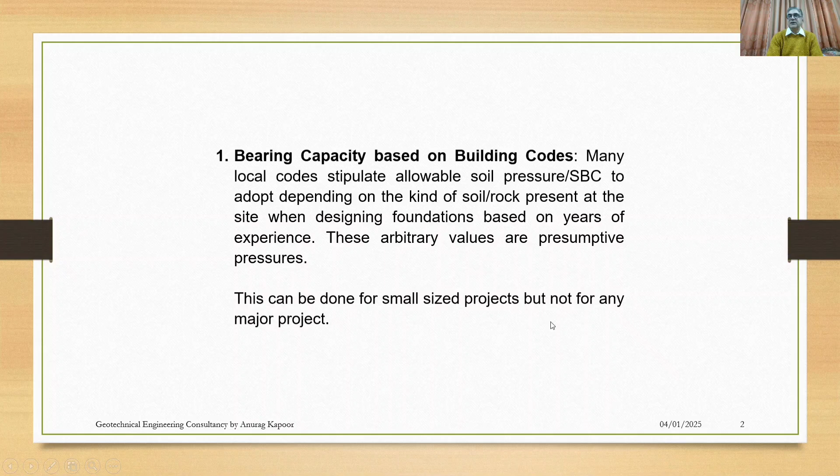Now, the more solid method is bearing capacity based on testing. In this case, thorough laboratory testing and engineering considerations justify adoption of exact worked out bearing capacity for presumed dimensions of foundations at any site based on the samples collected from beneath the ground level along the exploration depth.

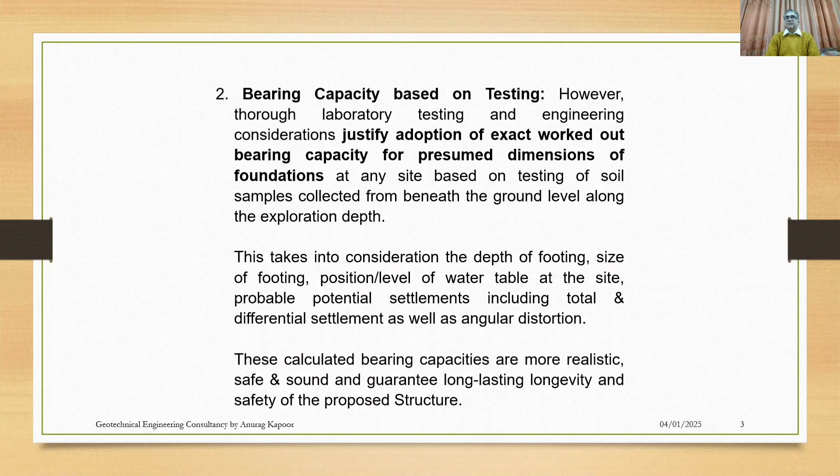This takes into consideration the depth of footing, the size of footing, position of water table, probable potential settlements including total and differential settlement as well as angular distortion for arriving at the safe bearing capacity to be adopted at the site. These calculated bearing capacities are more realistic, safe and sound and guarantee longevity and safety of the proposed structure. These two things I prefer to define before deciding on the factor of safety.

Now, what is factor of safety as per National Building Code of India? Factor of safety with respect to bearing capacity is defined as a factor by which the net ultimate bearing capacity is reduced to arrive at the value of net safe bearing capacity, as per clause 2.2.5 of Section 2 Soils and Foundations under Part 6 Structural Design of National Building Code of India.

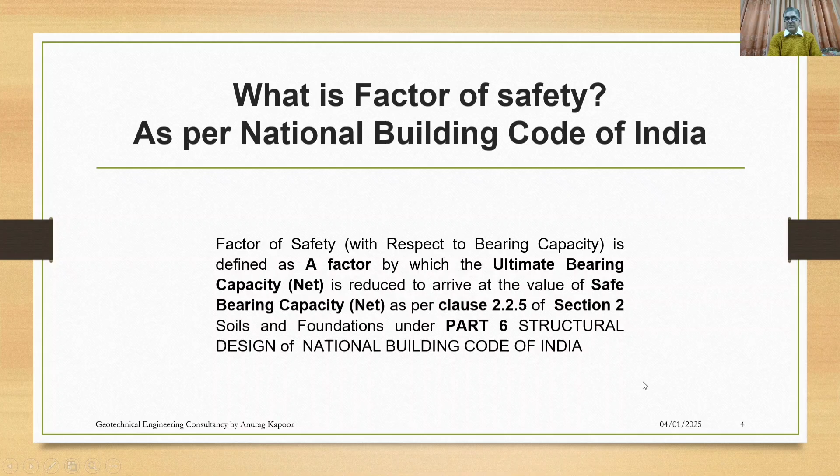Now, what does National Building Code of India say? As per Part 6 Structural Design, Section 2 Soils and Foundations, clause 7.1.2 of this code, allowable bearing pressure, says that it shall be the least of the following two: the safe bearing capacity on the basis of shear strength characteristics of soil, and the allowable bearing pressure that the soil can take without exceeding the permissible settlement limit as specified by the governing IS Indian Standard Code.

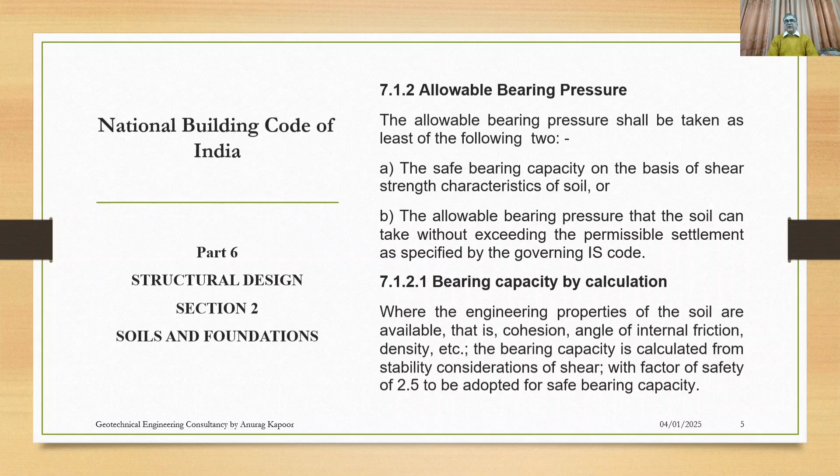Clause 7.1.2.1 of this code says that the bearing capacity by calculation is more accurate where the engineering properties of the soil are available, that is cohesion, angle of internal friction, density, etc. and other soil properties are found out. The bearing capacity is calculated from stability considerations of shear. With this, the code says that a factor of safety of 2.5 should be adopted for finding the safe bearing capacity, but my opinion differs from that. Actually, the factor of safety may vary from 2.5 to 4 and maybe even further up to 5, and it should be decided on a case-to-case basis.

The effect of interference of different foundations should also be taken into account while calculating bearing capacity. However, this is not the usual practice adopted. The procedure for determining the ultimate bearing capacity and allowable bearing pressure of shallow foundations based on shear and allowable settlement criteria shall be in accordance with good practices prevailing in the respective countries' codes, their codal provisions.

Now, this safety factor in foundation design is the factor which a structural engineer usually builds into the design of the structure. Buildings and all other structures are designed based on service loads and type of loading which they have to cater to during their lifetime, as well as the strength of the material of which these are to be built, with a certain adequate inbuilt safety factor already included in it for the sake of strength of concrete, etc.

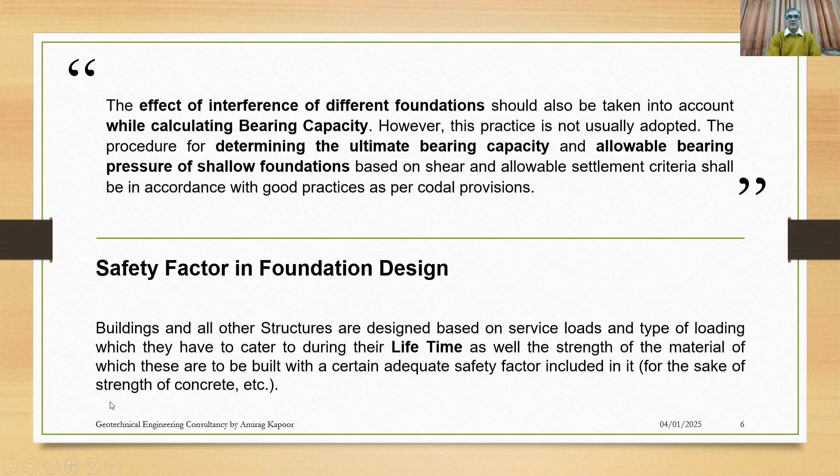Now, soil is very complex. Point to note is that the uncertainties involved in the elements of superstructure are limited in comparison to those in determining the allowable strength of soil. Why? Because soil does vary throughout the region, throughout the district, throughout the country. Now, what does the complexity of soil behavior actually depend on? It varies because of the lack of control over environmental conditions after construction. After the particular structure has been built, no one knows how the soil will behave. And also it depends on the environmental conditions as well.

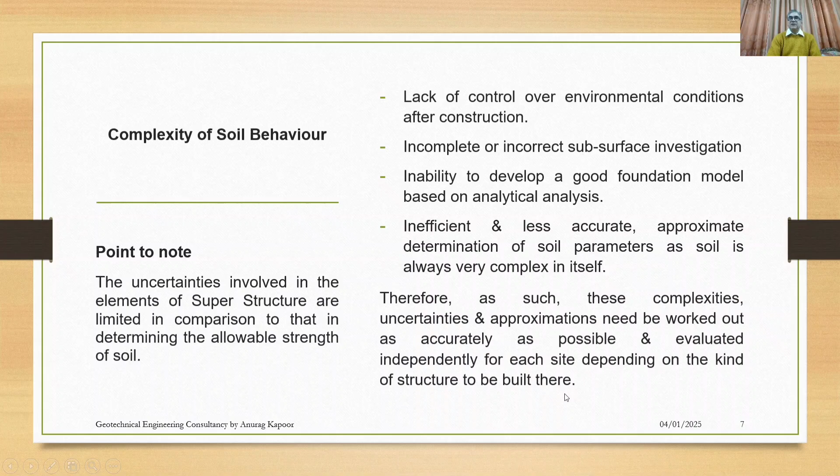Incomplete or incorrect subsurface investigation, inability to develop a good foundation model based on analytical analysis, inefficient and less accurate approximate determination of soil properties, as soil is always very complex in itself. Therefore, these complexities, uncertainties, and approximations need to be worked out as accurately as possible and evaluated independently for each site depending on the kind of structure to be built there before deciding on the actual factor of safety to be applied.

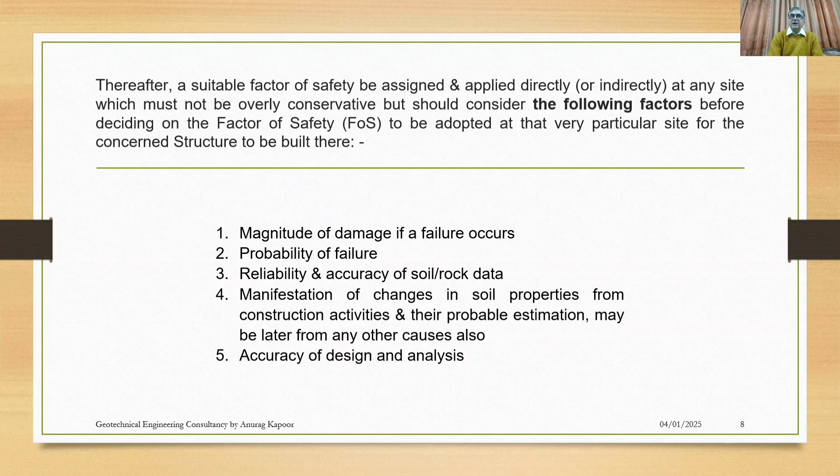Therefore, any geotechnical consultant should look into these following factors and others as well, which he thinks are directly or indirectly related, before deciding on the factor of safety to be applied at that very particular site for bearing capacity calculations. The usual factor of safety values are specified in different books differently. The range may vary a little bit, but it usually is

as per shear: earthwork for dams, fills, it usually is 1.2 to 1.6. For retaining walls, 1.5 to 2. Sheet piling cofferdams, 1.2 to 1.6. Temporary braced excavations, 1.20 to 1.50. And for footings, spread, mat, raft, isolated, strip, it usually is taken as 2.5 to 3, which may further be enhanced to 3.5 or maybe 4 in some cases.

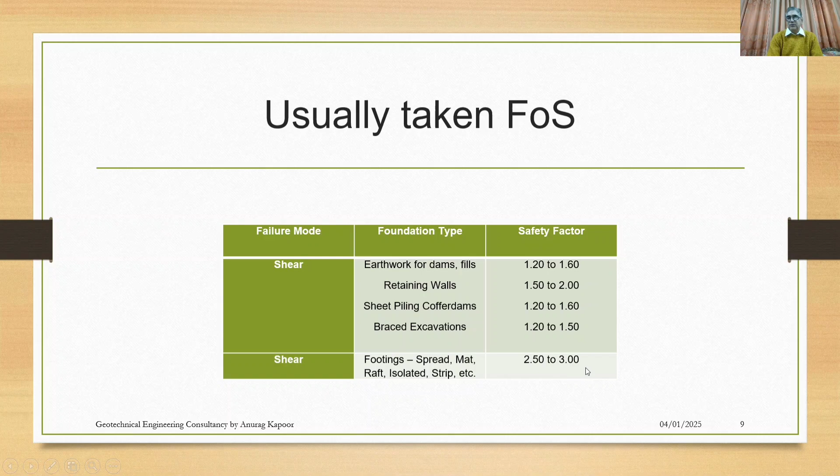Now the factor of safety ranges from 2.5 to 4 in my opinion, but it may vary on a case to case basis. Although the National Building Code now is suggesting a factor of safety of 2.5 to be taken. Actually, the confidence in factor of safety values comes from your experience. The more the experience, the more accurate the value you will be adopting. The confidence in sampling, field in situ tests, laboratory testing, analysis and interpretation.

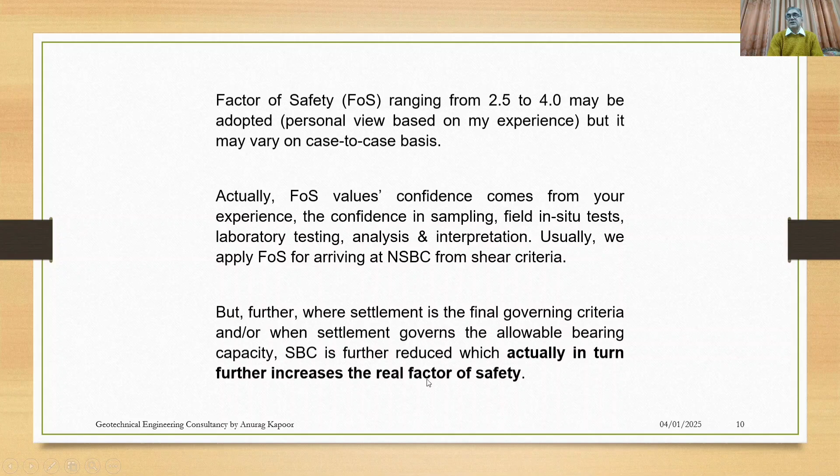Usually we apply a factor of safety for arriving at net safe bearing capacity from shear criteria. But further, where settlement is the final governing criteria, a very important line, and/or when settlement governs the allowable bearing capacity, SBC is further reduced, which actually in turn has increased the real factor of safety applied on that very particular structure.

It is usual to adopt lower safety factors for transitory loads such as wind and earthquake, but it is not an absolute requirement. Geotechnical consultants usually recommend bearing capacity after considering a suitable factor of safety, subject to the condition that net safe bearing capacity is safe from shear as well as settlement criteria as per prevailing codes of the region where they are providing their consultation services.

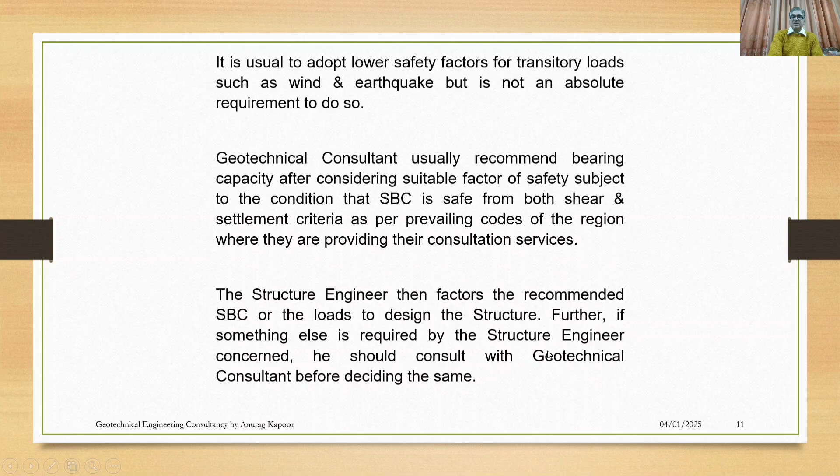The structure engineer then factors the recommended safe bearing capacity or the loads to design the structure. Further, if something else is required by the structure engineer concerned, he should consult with the geotechnical consultant before deciding on the same. The safety factor is based on soil type, whether the soil is cohesive or non-cohesive, reliability of soil parameters, the kind of structure to be built, and experience of the geotechnical engineering consultant.

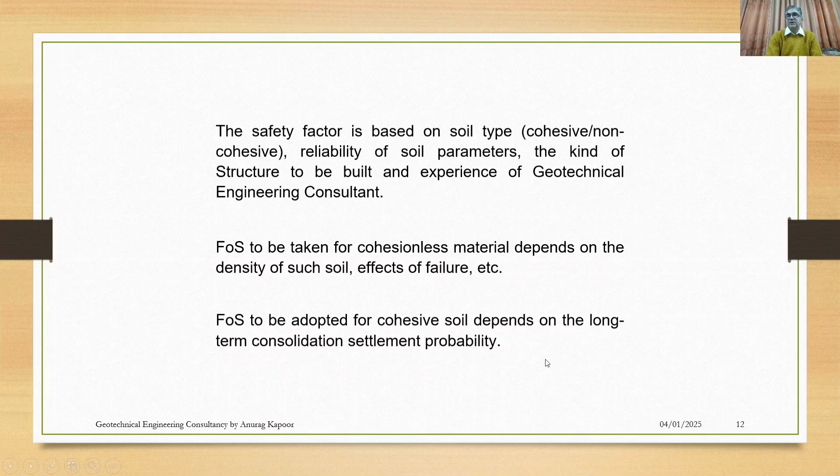Factor of safety for cohesionless soil depends on the density of such soil, effects of failure, etc. Whereas factor of safety to be adopted for cohesive soil depends on the long-term consolidation settlement probability of that very particular clay soil. Now, an important point which I want to highlight here is that the factor of safety which I was discussing prior to this slide was for calculating bearing capacity of footings, different kinds of foundations, etc.

But Indian Standard Code IS 1904-2021 states, as per clauses 17.1.1 and 17.1.2, that the factor of safety against sliding and against overturning are specified likewise. That is, for the factor of safety against sliding which resists lateral forces, such as in the case of retaining walls, if dead load, live load and earth pressures are considered together with wind load or seismic forces, it shall not in any case be less than 1.5.

But if dead load, live load and earth pressure only are to be considered without taking into consideration wind load and seismic forces, it should not be less than 1.75. And similar is the case while deciding factor of safety for shallow foundations against overturning. If all these 5 factors are inbuilt, it shall not be less than 1.5. If only the first 3, that is the dead load, imposed load and earth pressure without wind load and seismic forces, are considered, it shall not be less than 2.

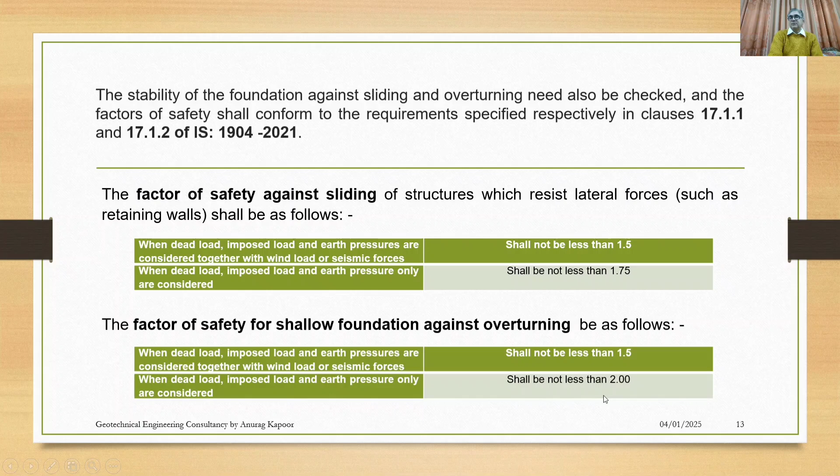You decide on your own by your conscience, but a little bit conservative approach should not at all be rejected or considered unnecessary, because even if it ends up with little larger foundation sizes, the incremental cost of such foundation is negligible. Why? Because the decision taken to increase the footing size is actually an assurance against foundation failure, as foundation remedial measures are very expensive if they occur in any structure after it has been built, when compared with any superstructure failure that may be localized, easily repairable and less costly.

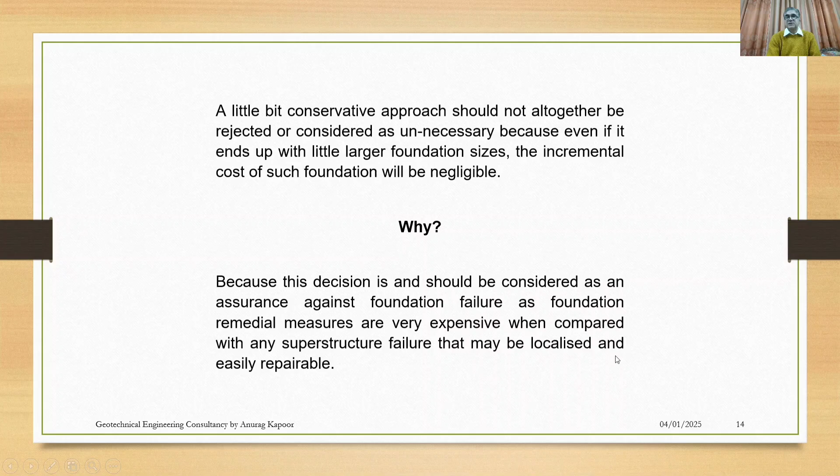Now at last, a very important point. A geotechnical consultant does not actually know, while finalizing the subsurface investigation report, whether the footing under consideration is subjected to eccentric loading and/or moment or not. At the same time, if settlement is the governing criteria for the recommended bearing capacity, it should also be checked for permissible differential settlement and angular distortion, which should necessarily be within the specified permissible limits

as per governing respective codes. Factor of safety therefore is a very important factor for any bearing capacity calculations in the preparation of a subsurface investigation report. And these values beyond these simple foundation types are all very different for deep foundations, machine foundations and tower foundations.